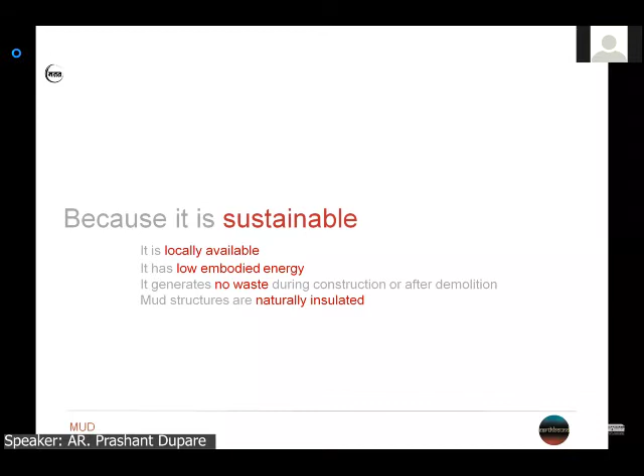Mud structures are naturally insulated and warm compared to conventional materials. For a country like ours, cost is a major driving factor as we struggle to provide good housing to all. People can build their own houses with mud if we can bring back this tradition. Mud structures are more labor intensive and can be made using local labor with basic training. The exchange of the traditional knowledge of local labor and our scientific and architectural understanding of mud has been phenomenal. Third is because we can build so-called pakka buildings with mud.

It is a myth that only RCC buildings are pakka and mud structures are not. There are more than 300-year-old structures built with mud which are standing in good shape, while RCC buildings have a lifespan of 40 to 50 years. Fourth, mud structures are healthier to live in and adjust to seasonal changes, creating a more natural, comfortable building for the human body. So then why don't we use it? Actually, the answer is we used to, and now we have stopped. There are more houses built with mud in India than any other material.

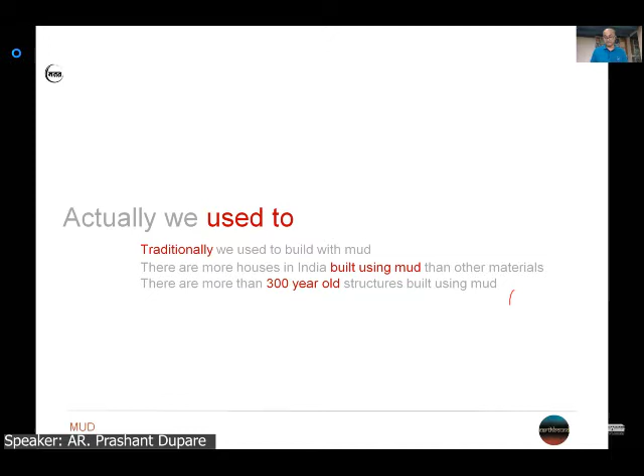Initially, we used to build with mud, but in modern times, during our professional education, we are usually taught how to design with RCC and not mud and other natural materials. According to me, it is the need of the time that we remove the tag of poor and kacha from mud and get it back into the mainstream for the sheer value it provides. Now, the important question is how do we use it? So let's start with where do you get mud from?

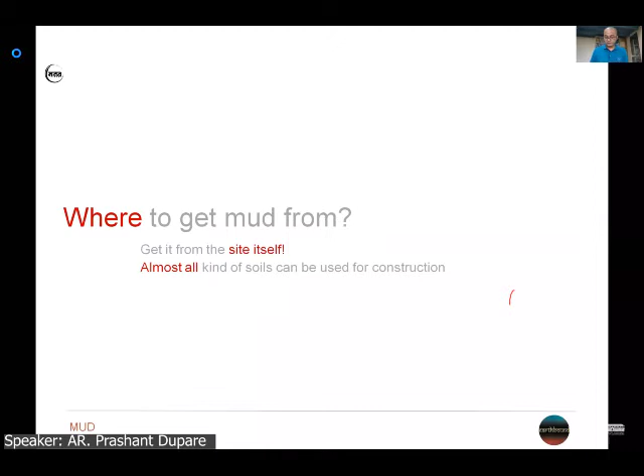Actually, it is ideal to get it from the site. If you don't have it available on site, you can procure it from the nearest available place, but most probably you will have it on your site. We can dig a small pit to see what kind of soil it is. Avoid using the top layer, as it consists of decaying organic materials like leaves, which are not suitable for building but are very crucial for farming. Below that, the soil consists mainly of gravel, sand, and silt. So how do we know the suitability of soil for construction? The most important factor is the clay in the soil. Usually, it should have 15 to 30% clay.

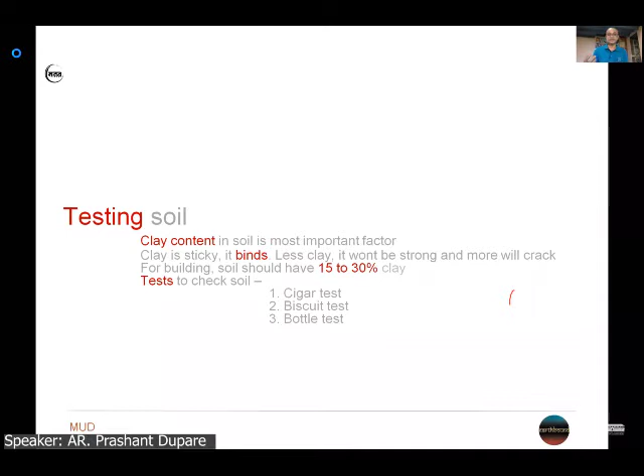So that proportion is then suitable for the construction. Get soil tested in lab. One can perform simple tests on field, which will give indication of percentage of different contents in the soil. So let's talk about the different tests. First one is cigar test.

Take some moist soil in your hand and roll to make a cigar shape. Now squeeze it and see how long before it breaks. If it does not get shaped at all and falls into pieces, that means it has too much sand and no clay. If it gets squeezed to 2 to 3 inches before falling off, it has a good mix and is good for building. If it gets squeezed to 8 to 9 inches, that means it has too much clay.

Next test is biscuit test. Take some moist soil in hand, make a biscuit shape of it and let it dry under the sun. If it crumbles while drying or gets crumbled very easily, then it has too much sand and no clay. If you can break it, but it takes pressure to crumble, then it has a good mix of sand and clay and it is good for building. If it is hard and difficult to break or you can't powder it, it means it has too much clay.

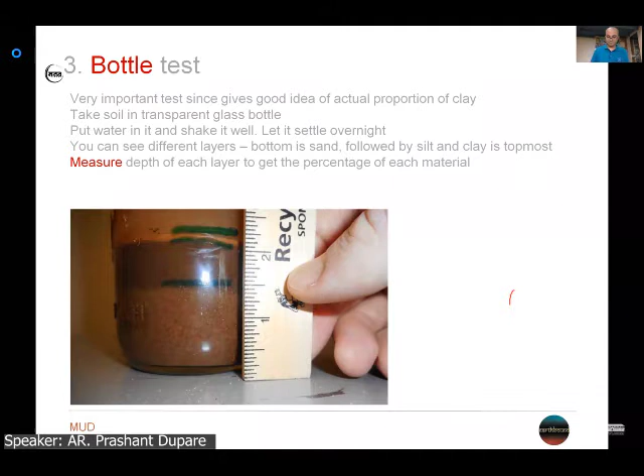Next and the most important test is bottle test. We recommend doing this test because it will give you a much better idea of the proportion of sand and clay in the soil. Take some soil in a transparent glass bottle, put water in it and shake it well. Ensure that it is mixed properly and let it settle overnight. Sand is the heaviest and will settle in the bottom part, followed by silt, and clay will settle on the top. Measure the depth of each layer and it will give you an idea of the proportion of each in that soil. Clay is sticky and it binds different contents of soil.

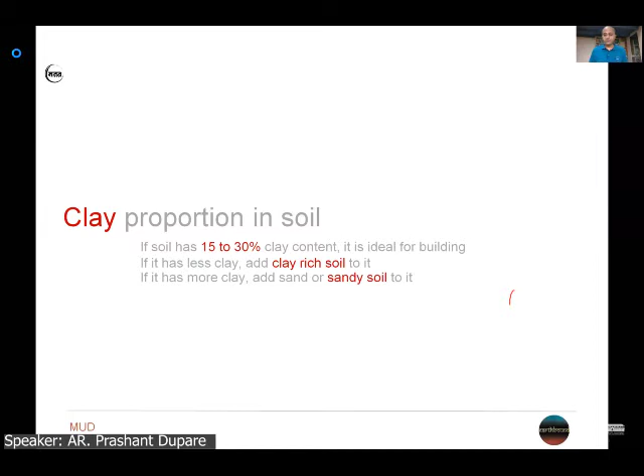The percentage of clay should be between 15 to 30. If there is less clay, it won't be strong enough. You will have to add more clay rich soil to it. If there is more clay, it can crack easily. You have to add sand or sandy soil in it. We can actually avoid using sand if it is not available locally by using surki, which is burnt bricks powder.

Let's talk about soil stabilization. Because each soil has different contents in different quantity, depending on the nature of soil, the stabilizers need to be added in the right proportion and tested to ensure that the mud structure is durable and strong. It is important to give time and effort to this step, since a lack of understanding here can cause further issues during execution and the use of the structure.

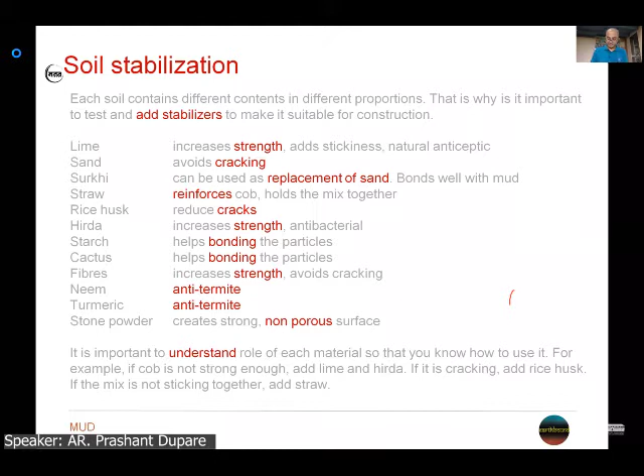Cement and lime are the most commonly used stabilizers. We recommend using lime over cement wherever possible. Lime is naturally available, unlike cement which requires a lot of energy for production. Lime has a tendency to get stronger with time, while cement gets weaker. There are other naturally occurring stabilizers like neem leaves, etc., which have different functions. Some have binding properties, while some improve the strength. Some act as anti-termite, while some help in avoiding cracking.

Now, actually building with the mud. There are 5 main types of mud construction. Traditionally, any region would use one of these systems, and in some cases, a combination of 2 or more are used. Each system has its own merits and limitations. It is important to understand those so that we can use them according to climate and building requirements.

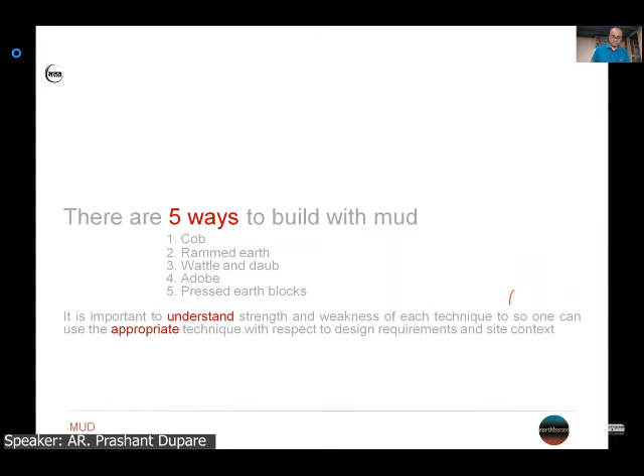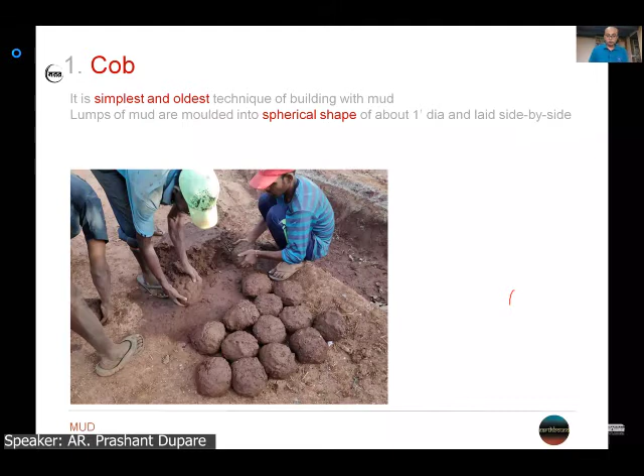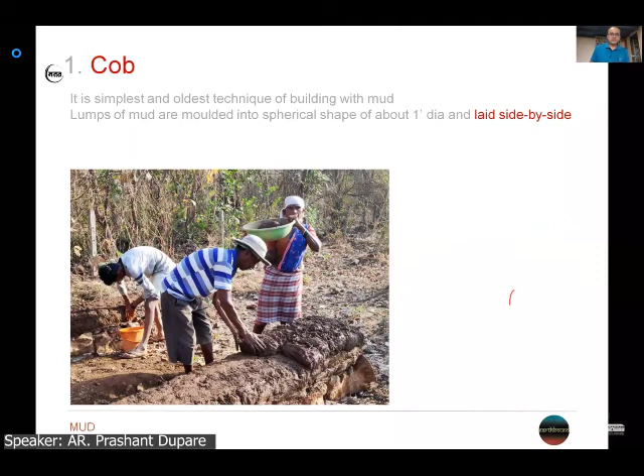First is cob. Cob is the simplest and oldest technique of building with mud. Large lumps of mud are roughly molded into spherical shapes of about 1 foot diameter, which can be held in 2 hands easily. Start building the wall by putting these balls on the surface and pressing them. It is very easy to create different shapes with cob, so let your creative juices flow. Cob is mainly used to make single story structures.

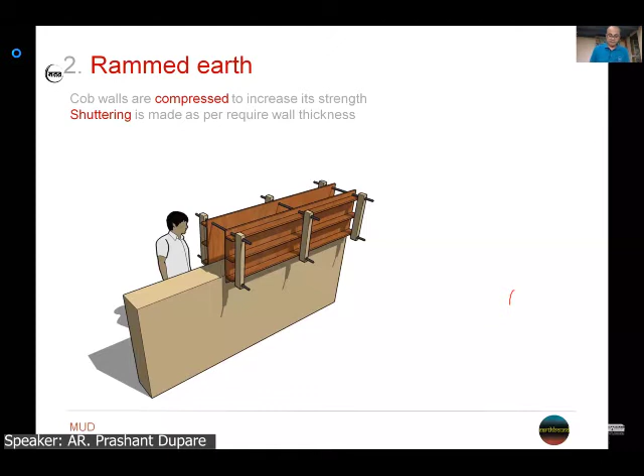Next is rammed earth. These are cob walls which are rammed to increase their strength. Shuttering is made so as to hold the mud in the desired wall thickness. The mud is rammed using a wooden or metal ram rod. Rammed earth walls are stronger than cob and are suitable for approximately 2 to 3 story buildings. Next is wattle and daub.

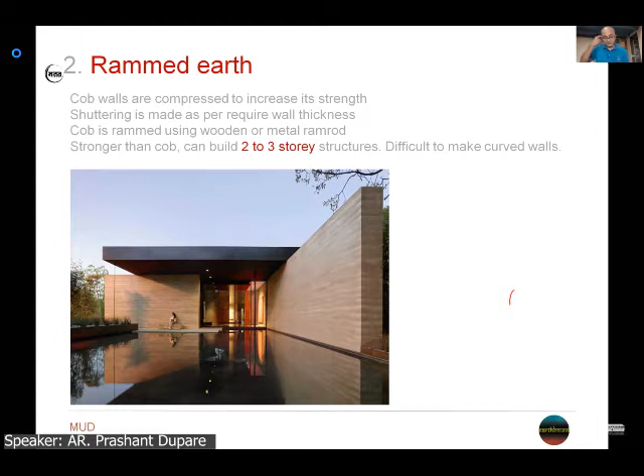Wattle and daub walls are non-load bearing walls. They are built using cane or split bamboo woven around wooden or bamboo posts. Their key advantage is flexibility, so different shapes can be achieved using wattle and daub.

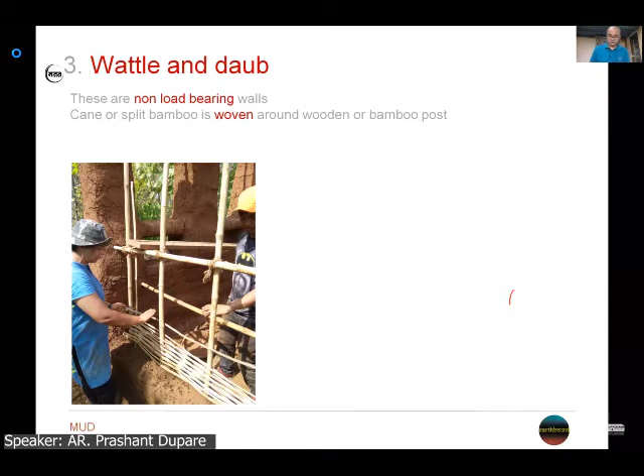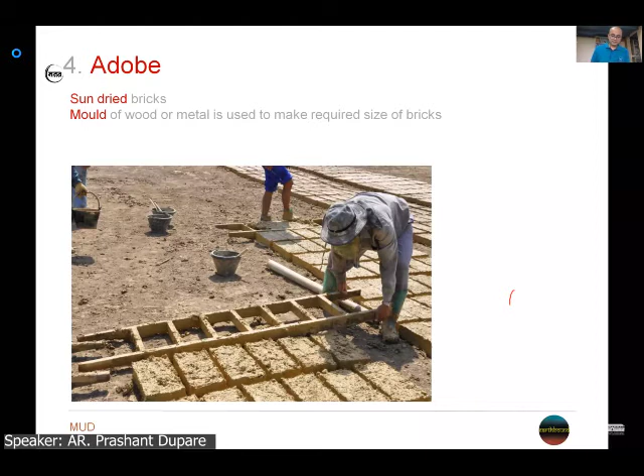Next is Adobe. Adobe are basically sun-dried bricks. A small mold of wood or metal is used to make bricks of the required size, turned out of the mold, and left to cure slowly and dry. They can be used just like regular bricks, and 2 to 3 story structures can be built using Adobe.

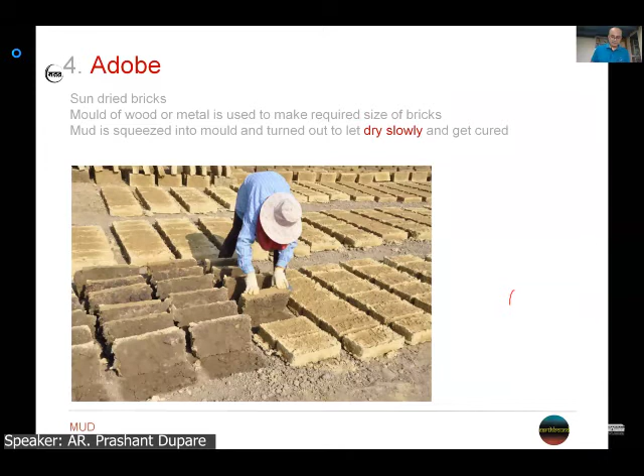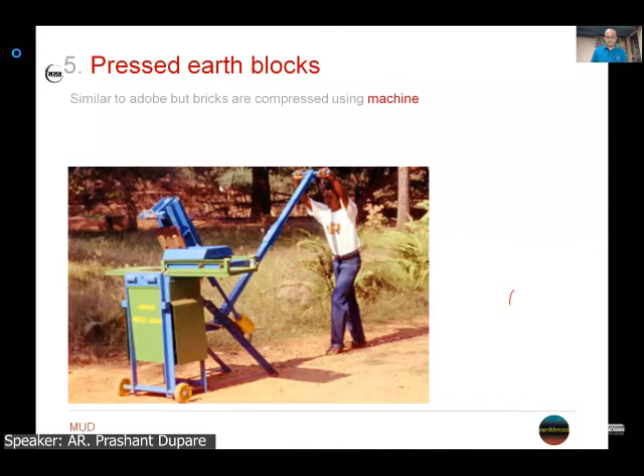Next is pressed earth blocks. These are similar to Adobe, but the bricks are compressed using a simple machine. The mud is usually stabilized using cement or lime, and these bricks are as strong as regular burnt bricks.

Now let me talk about our experience of building with mud. We are currently making a natural building in Wada near Mumbai. We'll talk about our experience of making it, right from the design process to passive climate technology and the construction technologies used.

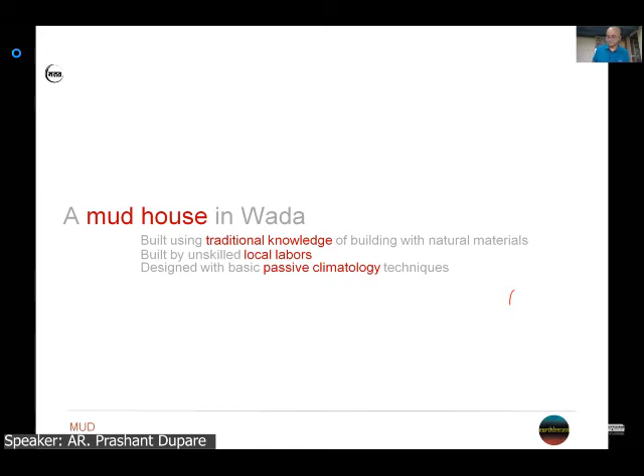So let me start with the design process. The site is a small hillock situated in Wada near Mumbai. The hillock consists of plantation of various trees and partly natural jungle with a fine blend of flora and fauna. Preserving the trees on site was important, so we decided to build around the trees. The house is planned around a big old umbar tree, also known as gular.

We started with measuring the diameter of the tree and marked it on a grid paper, and similarly marked other trees around it on the grid. Having all the trees located on paper helped us figure out where and how we wanted to build.

With mud, there is a kind of flexibility it offers. One can easily create free flowing organic spaces and forms using mud. It is like hand sculpting your space the way you wish, so you can unleash your creativity with mud house design.

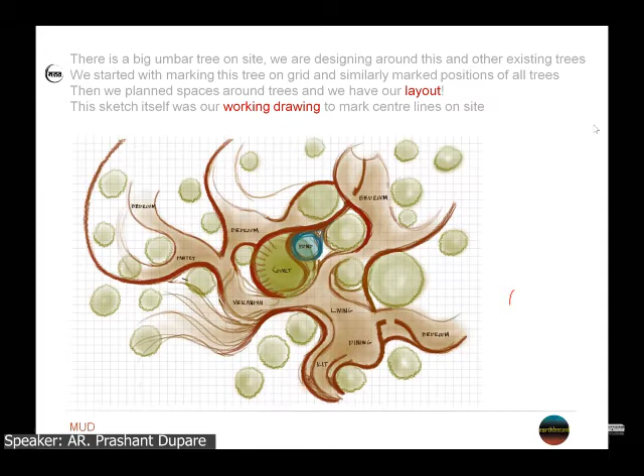Once we had the basic layout in place, it was a good idea to make a small model. The model helped conceptualize the three-dimensional sense of space and helped us understand and decide compositions of wall, roof, etc. Clay is a fantastic material which allows making free flow models easily. We used this model to explain the design to the local laborers on site.

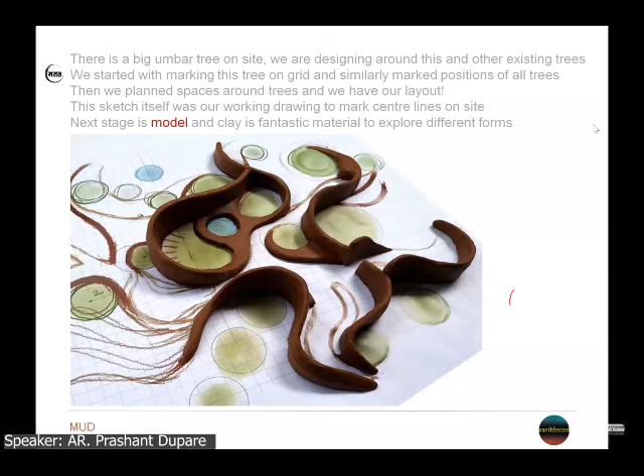A basic principle of designing a sustainable building is using passive climate technologies while designing, instead of introducing artificial energy-intensive corrective measures later during the use of the building. The building orientation is as per sun path, seasonal changes, and use of the rooms.

The areas to be used maximum open towards the north, for north light, and avoid harsh south light. Roof slopes are maintained to avoid heat gain through the day. We spent time on site to understand the wind flow patterns and positioned the openings to maximize wind catchment from the site. The building uses courtyards to allow ventilation throughout the structure.

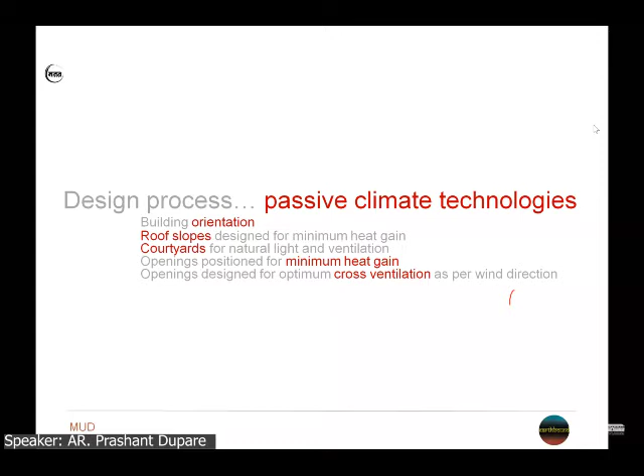Cross ventilation is critical in humid climates. Along with the use of mud, the internal temperature in the structure should be comfortable no matter what the season is. Now the materials that we have used can be divided into three main categories.

First is local material available on site. The soil was dug out from the site to create a pit which will be used as a farm pond. The wood was cut from teak trees which had been planted 8 to 10 years ago, cut with the help of local experts who have been cutting wood for generations. They understand how to ensure that the cut allows regrowth of the teak trees without permanently damaging the roots.

The stone was easily available on site and was used mainly for the rubble foundations in its natural form. Local bamboo is used for wattle and daub walls.

The second set is regenerative natural materials like lime. Lime is used instead of cement, and we have actually ordered bamboo from outstation because the locally available bamboo was not of construction quality.

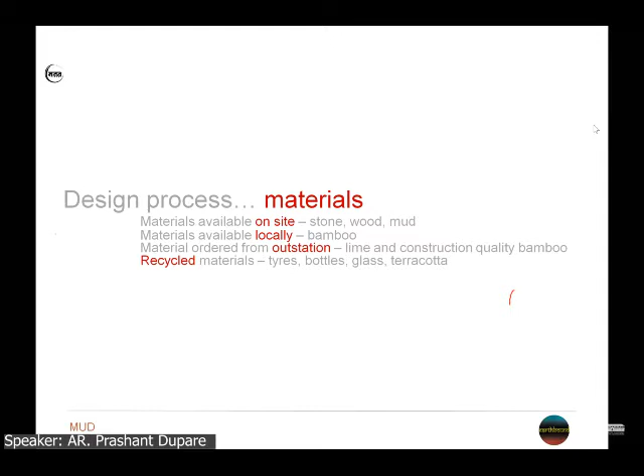The third category is recycled materials. Since mud allows working with a lot of different materials together, we have recycled old bottles and tires for window grills and supports, and broken pieces for windows, doors, and roof.

So let's talk about the construction technologies we have used for the project. The site is rocky, and we reach hard strata within a maximum of 2 to 3 feet of digging. We have used random rubble foundations due to easy availability of stone on site, its durability, and because it's less labor intensive. The random rubble foundation is one of the least expensive foundations.

We decided to use walls made of cob due to the load bearing capacity. It also offered flexibility for curvilinear walls and climatic conditions on the site. The base layer of plaster is made of mud and lime, and for finishing and waterproofing, lime plaster coats will be done.

The green roof is still to be completed. We are using treated natural wood and bamboo. The bamboo was treated using boric acid borax solution on site, and wood is being coated with linseed oil before use. The floor will be rammed cob, which will be sealed and waterproofed using wax and linseed oil.

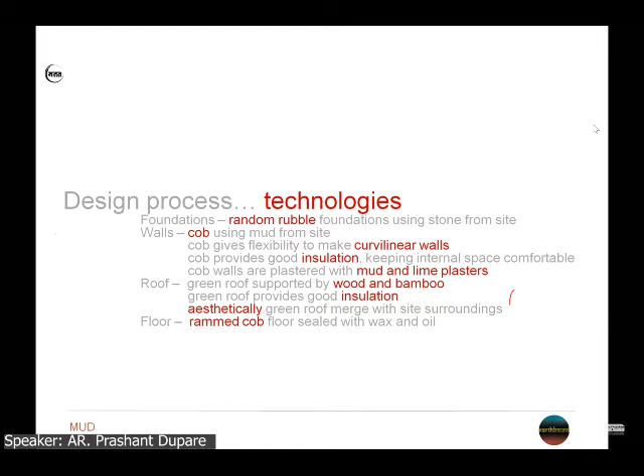So let me talk about the foundations. After marking the wall positions on site, the soil was excavated to make a 2 feet wide trench.

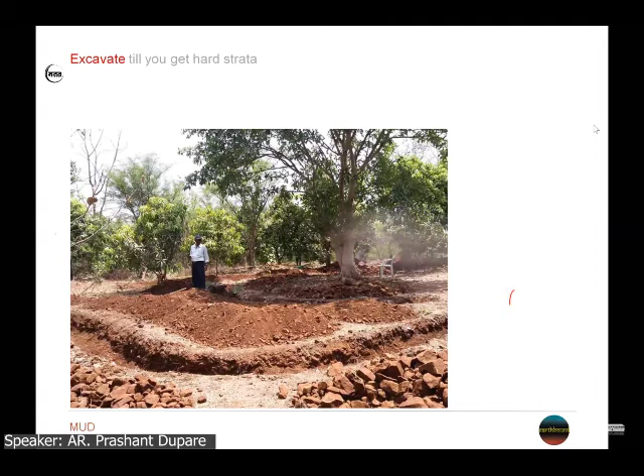The first layer of soil is done with small stones, which forms the flat base surface to put big stones. The next layer is of rubble such that they overlap with each other. Fill the gap in between with smaller stones or gravels. The gap between the rubble was filled with mud and lime mortar paste. The lime mortar paste consists of 1 part mud, 1 part surkhi, and half part lime.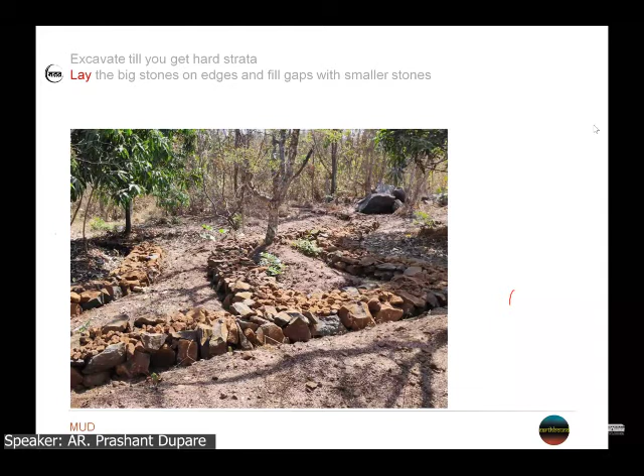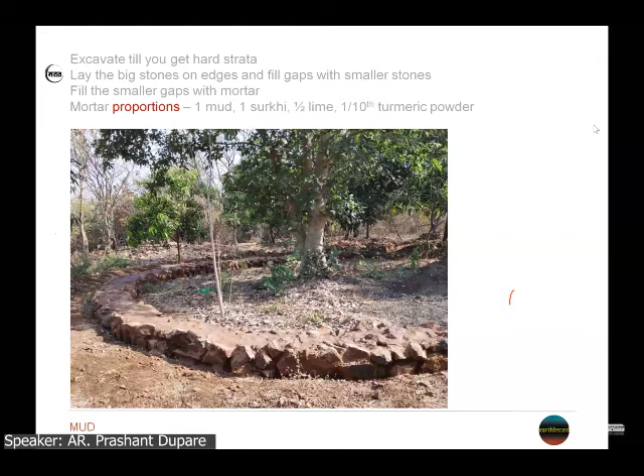So we started the process of cob walls, sample cobs. It is very critical to try different proportions since each soil is unique. The cob making simply requires the aggregates and admixtures in place, the local labor, and some fun community spirit. The process of cob making with all the ingredients in place was quite fast, and the design needs to be in place along with the other materials during the construction.

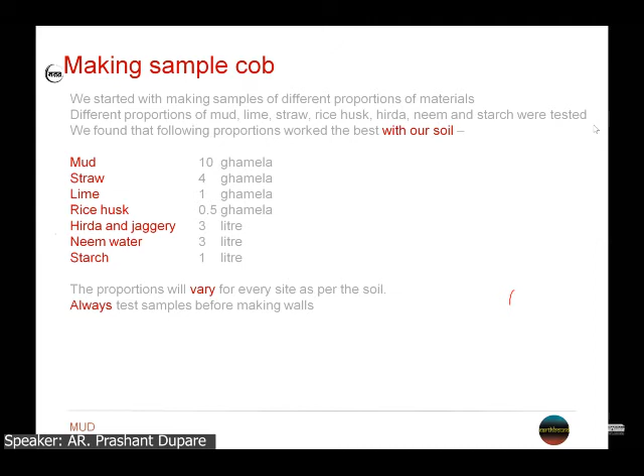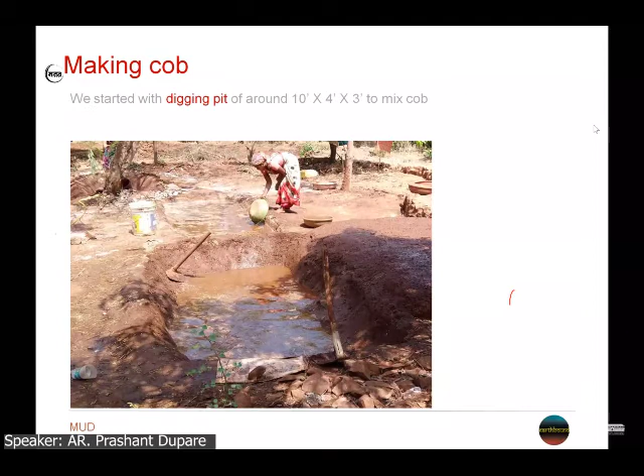We have used bamboo beams and wood as lintels to give shape to the openings. Connections need to be put in place since the walls are quite hard and thick and not easy to dig into. The electric piping is done after the walls but before the plastering.

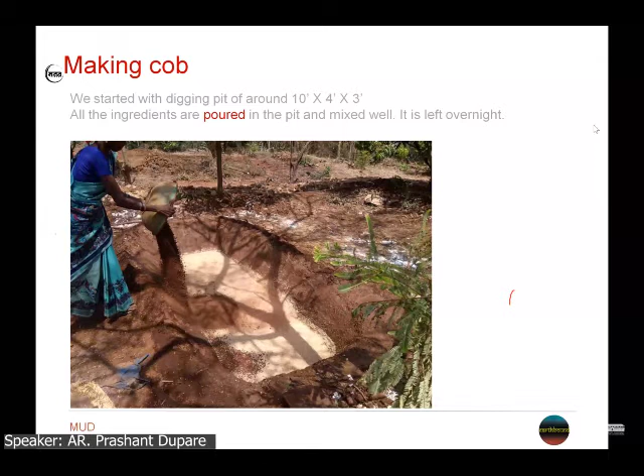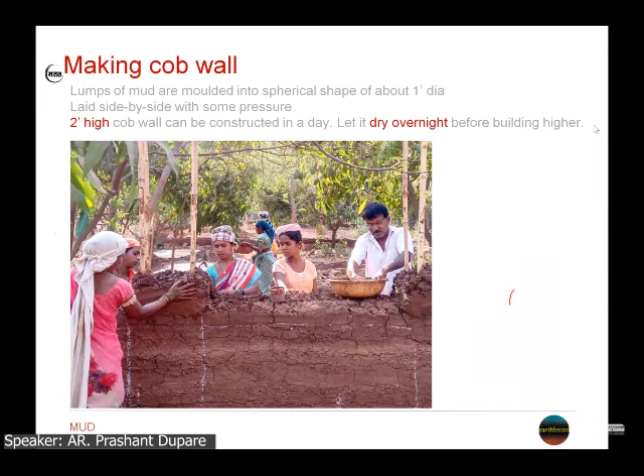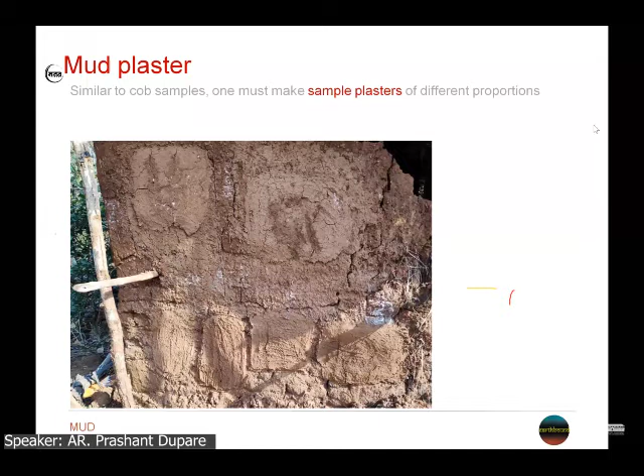If you cross a monsoon during construction, the walls need to be protected entirely during the rains. Mud walls exposed to rains without the plaster lose strength and cracks need to be checked through samples and by adding various admixtures. However, the important thing to understand is that any ingredient to cob and plaster has to be added for a reason. You need to understand the role each ingredient plays in the whole and then take a decision.

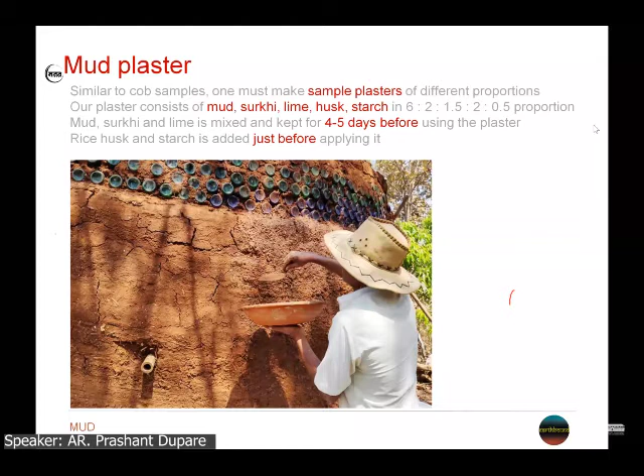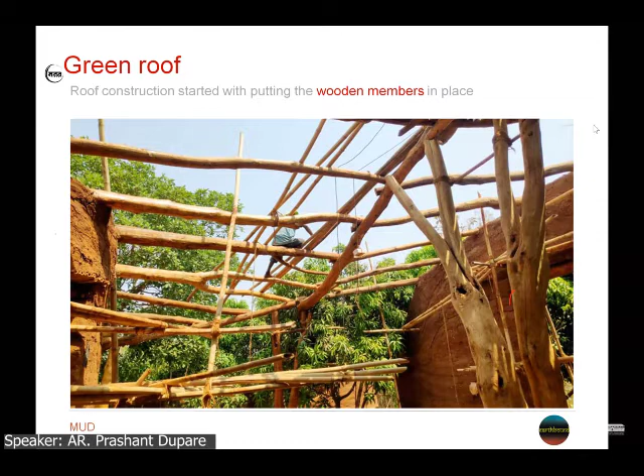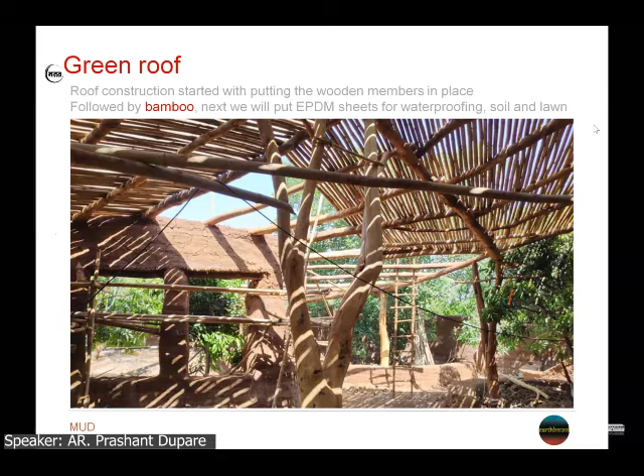The roof of the house is going to be a green roof, which is basically a waterproofing lining of EPDM sheets, organic soil, and the top layer of lawn. The roofing layer gets to be quite heavy, especially during the rains, and drainage and waterproofing need to be in place for the structure to be successful. So you can see the bamboos laid over the wooden beams, and we'll be putting this EPDM sheet over it, and the layer of soil, and finally the lawn.

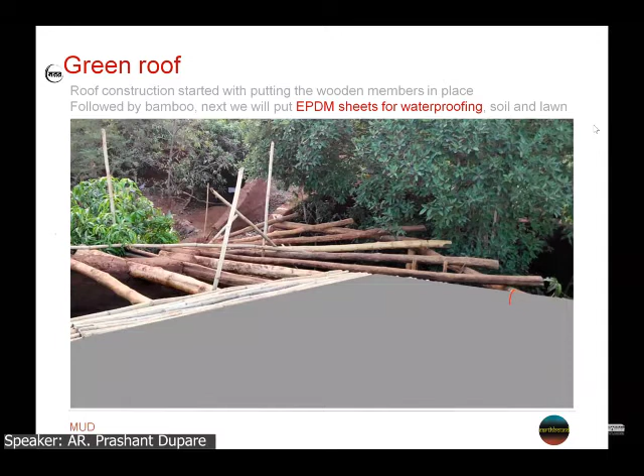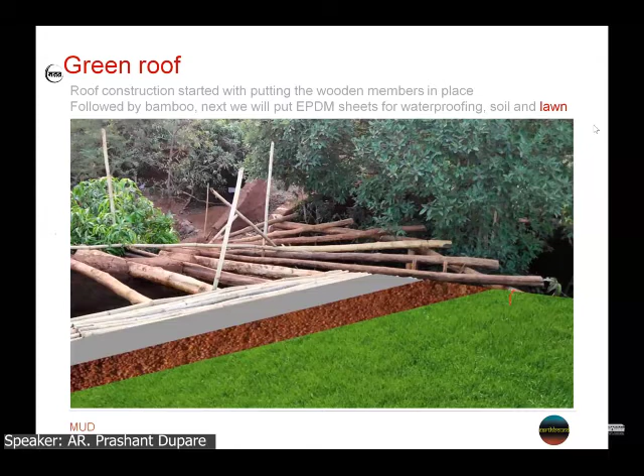It has been a very exciting and satisfying journey working with mud. We have been training local unskilled laborers and learning their traditional methods from them. It is a wonderful experience to see your imagined spaces taking shape. While building with mud, it is important to understand how to use it for construction. This understanding gives a clear picture of the limitations and opportunities any material or technology offers.

It's important to protect the walls from direct rain, so it's important to provide sufficient roof overhangs. Lime is a beautiful natural material to protect the mud. It offers good water resistance. Apply lime plasters and lime wash to walls exposed to heavy rains.

Because each soil is different, it's difficult to standardize the proportions for mud construction, so one must test different proportions of local soil with admixtures before starting the building. It is difficult to build high-rise buildings with mud, though there are a few ancient high-rise structures built with mud.

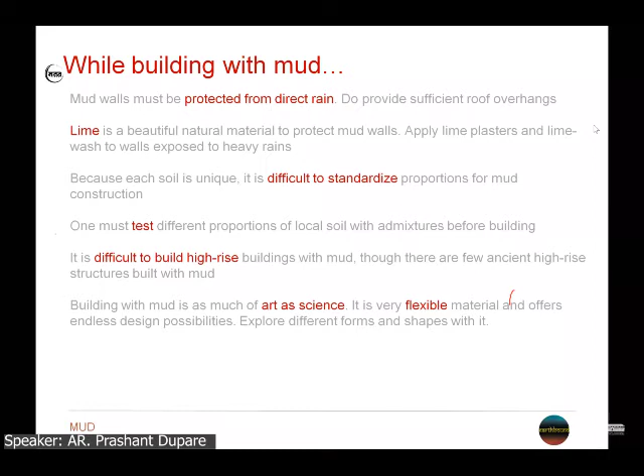Building with mud is a very flexible material and offers endless design possibilities. Explore different forms and shapes with it. There are a lot of inspiring and durable buildings of mud all over the world. We have traditionally used it in India very successfully for various regions and climates. There is a lot of research on ancient techniques and a lot of community out there if you want to reach out and find out about mud buildings.

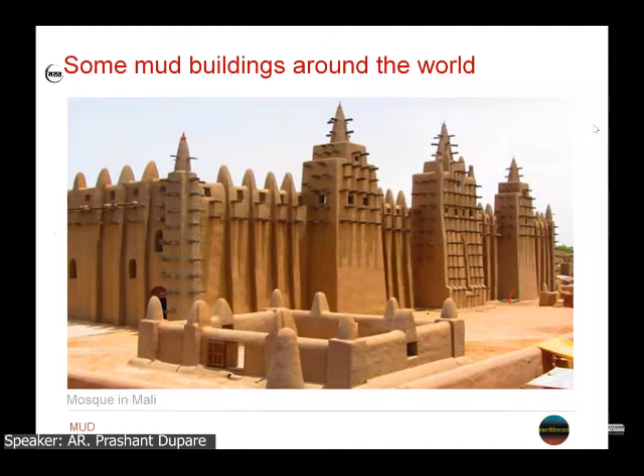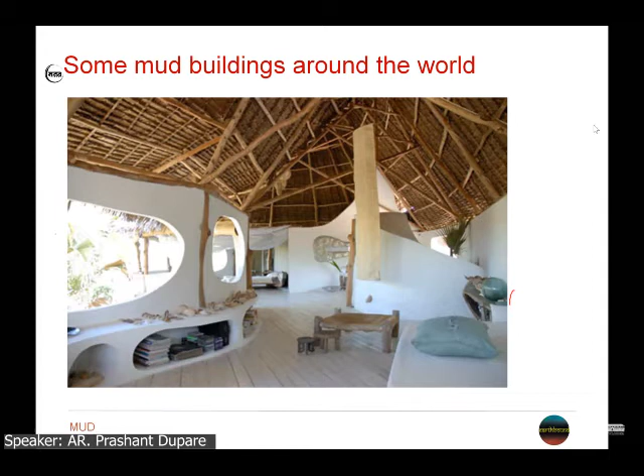But understanding mud is difficult since the basic nature of mud is local. So mud buildings require time on site. It's important to hold the mud in your hand, feel it, understand it, and respond to it. Let the mud talk to you, and you will feel the joy of working with mud.